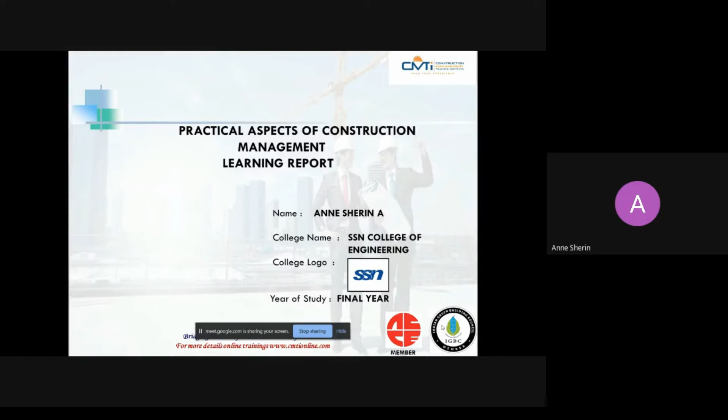I'm going to share the knowledge I acquired during this one month internship on practical aspects of construction management. I'm Anne Sherin, studying final year civil engineering at SSN College of Engineering. I'll cover topics such as construction site safety, reading of drawings, construction methodology, quality assurance and control, and finishes.

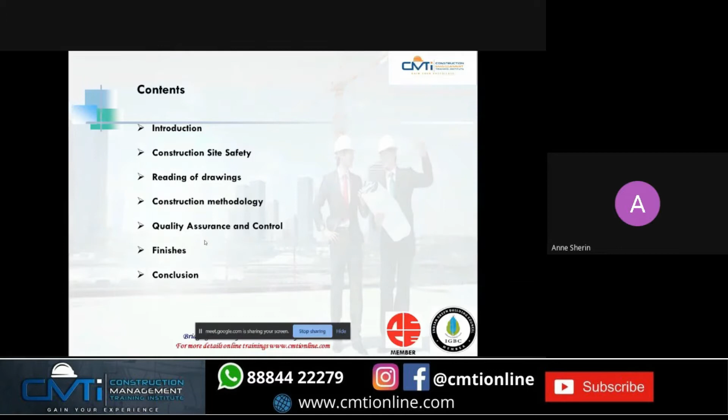Construction site safety is one of the most important topics for all site engineers and civil engineers to know, because our health and our life are more important when it comes to work.

As per the survey, 56% of accidents occur due to height factors, such as working at height or falling from higher regions. 21% occur due to being trapped by something collapsing or overturning materials or machinery. 10% is due to being struck by a moving vehicle, 5% by electricity or electrical discharge, 4% by being struck by a flying or falling object, 3% by contact with moving machinery, and 1% by exposure to hot and harmful substances, like heating materials.

The first and foremost thing to see is safe access on site. Everybody should have safe access to come to the site. The edges where people could fall must be provided with double guard rails or suitable edge protection so people won't fall off.

That's why most construction sites have barricading, because normal people can't enter the project site—if anything goes wrong, the project will come under problem, and it's not good practice. Any construction site you visit will be closed off with GA sheets or similar, and only security will permit entry. Even engineers going to the project site are given orientation at the entry point itself.

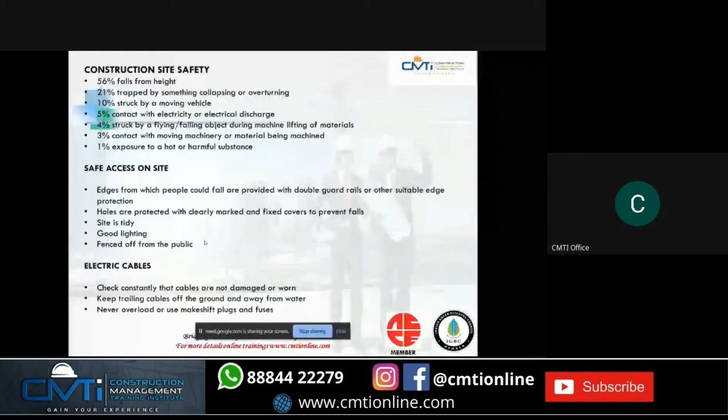That's why every project has a safety park or safety orientation room at the entrance where they give orientation. After that, with their people, you can go inside the project.

Another thing is holes—holes must be protected and clearly marked. As mentioned, they should be fenced off from the public for safety reasons.

Another thing is electric cables. Especially during rainy seasons, they should be properly maintained and carefully insulated, and we have to note any damaged or worn out cables, because contact with water can seriously affect anyone who accesses it. Inside, we also have to use plugs and fuses. Many new technologies are available in the market—for example, if there's a short circuit in any electric branch, the entire line will be cut off so we can stay safe. We have to make use of these technologies for electric cables.

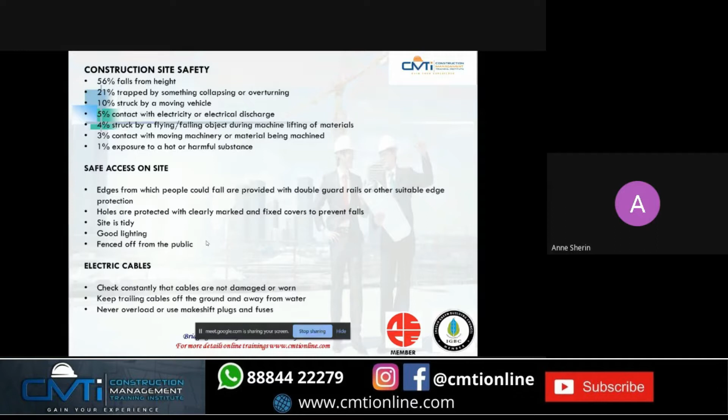Working at heights is another very important factor to consider—proper nets and other features should be used. While using ladders or scaffolding, proper fixing and base support should be provided so they stand sturdy. We should not use incomplete or damaged scaffolding; it should be safe, and handrails and toe boards must be provided at all edges.

And coming to the ladder, we should not allow more than one person on the ladder.

Do not lean out from the ladder in any direction. It should be positioned near the object while we are working. We should not allow others to work under a ladder in use, because something may fall, or the ladder may slip onto the person working under it. So we should not work under the ladder.

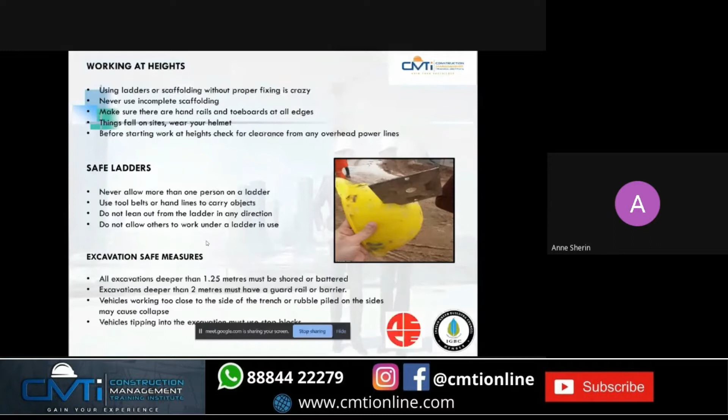For excavation safety measures, when the excavation is more than 1.25 meters, we have to provide shorings and battering supports, because we do not know much about the soil type, so it may slide off. We should provide protective shorings, and if it is more than 2 meters, we have to provide guardrails or barriers.

Also, vehicles like cranes and JCBs coming near a trench or excavation should move very cautiously, because they may slip into the excavation. So we should use stop blocks for vehicles to prevent them from coming near the excavations.

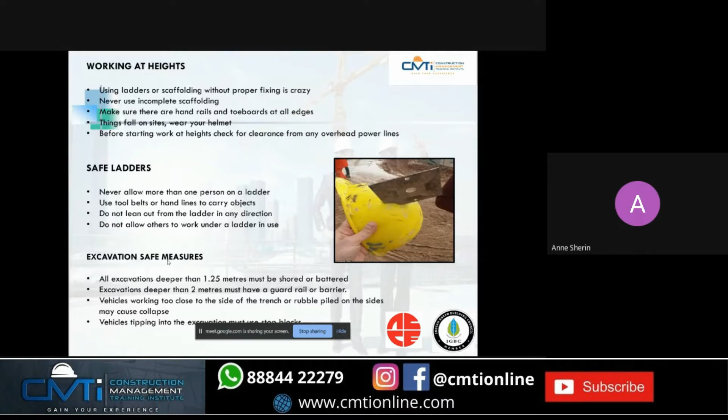Another thing is crane safety. The weight of the load must be carefully estimated, because if we overload the crane, it may overturn or slip. We have to perfectly calculate the weight of the load before loading the crane. The load must also be properly fixed, with no eccentricity, because it may tend to slip as the load acts on one side of the crane only. The bankman must also be trained to give clear signals.

Also, there should be a suitable base closure to prevent people from entering, surrounded by nets or grills so it is safe for people around it. The landing gates should be kept shut except when the platform is at the landing operation, or whenever it is in operation.

So these are some points to be noted while considering construction site safety, because safety is everyone's responsibility. We have to take care of our own safety and also the safety of the people around us.

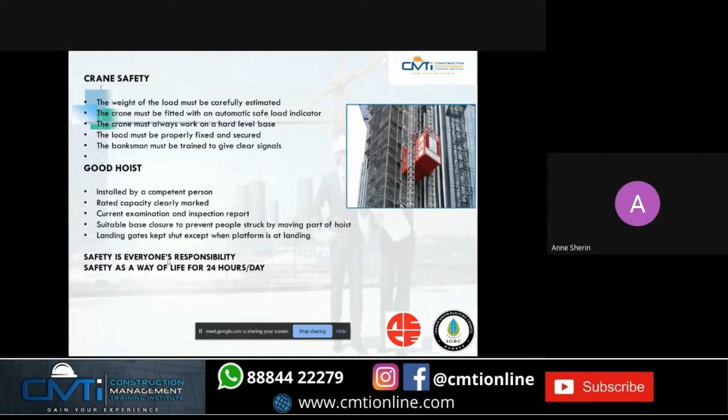And next we are coming to reading of drawings. One drawing... In a way of safety, I would like to add - go to the earlier slide. Okay sir.

Most of the people working in construction sites are from an agriculture background, they don't know about construction works. If they are new to the project site, they tend to get into an accident. Statistics say this happens because they are not trained on construction safety. Big companies train on safety and give induction training before sending workers to the site. But small companies directly send workers to the site, and accidents happen, hurting workers, causing a lot of injury, all due to ignorance of construction safety.

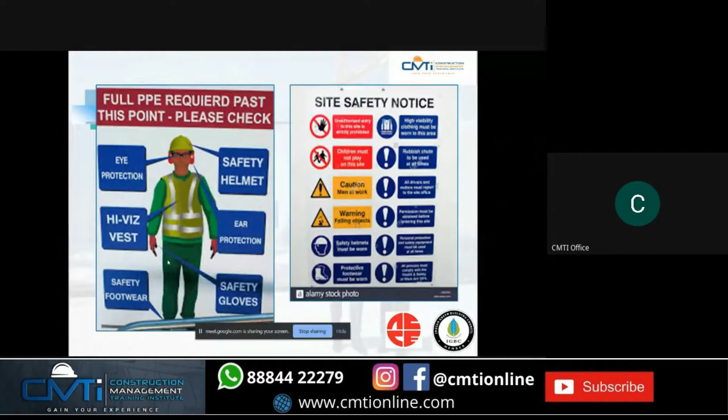Drawings are a way of communication between civil engineers. It's very important for all civil engineers to know this, because design engineers communicate via drawings to people on site. So it forms a communication channel between design engineers and the people working on site. A drawing sheet consists of plans, sections, elevations, schedules, and details.

Now we are going to see each of the components present in the drawing sheet.

The title block is generally present at the bottom of the drawing sheet, and its size and shape vary from project to project. This is a very important section because it gives information about the project, company, copyright information, plan number, drawing sheet number, revision date, scale of the drawing, sheet number, etc. So it gives a lot of information about the project and the drawings.

Each one should read the title block before starting to read the other drawings.

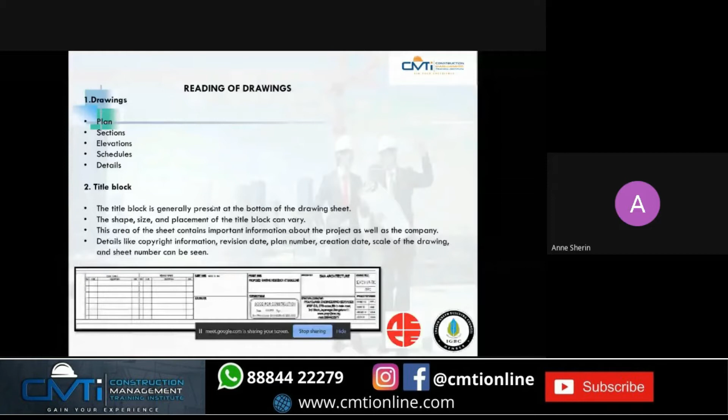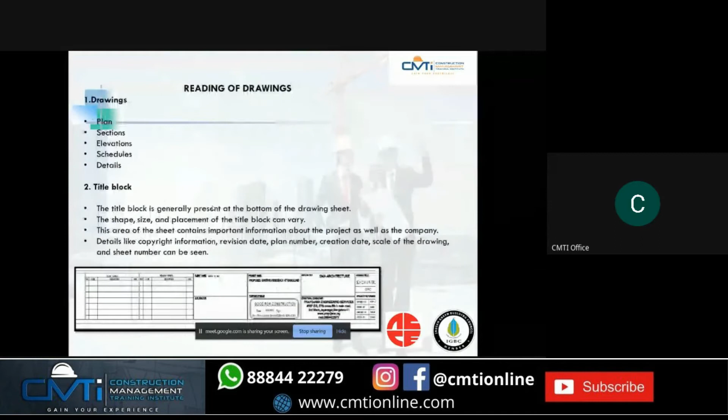Another important label is 'good for construction'. This seal is important for the title block approval. There will be a drawing number and reference given, and a title, and the stakeholders available. That information tells you whether you are referring to the correct project and using the correct drawing. You should verify.

After that, you have to read the drawings, because many times the drawing looks similar but may be used for another project.

Nowadays, the technology is advanced. They are having a barcode system, similar to how you use barcodes in Paytm or Google Pay. Similarly, in a drawing sheet, they mention barcodes because drawings go through revisions, as changes keep happening. So the engineer at the project site has to use the latest drawing. The technology is advancing, and a lot of large companies have an app on their mobile itself.

So that you can refer to only the latest drawing available in the app. Apart from this, they are using this barcode system also, because thousands of drawings are coming in - how will they be maintained? So they are using barcodes also. That is the latest advancement in drawings.

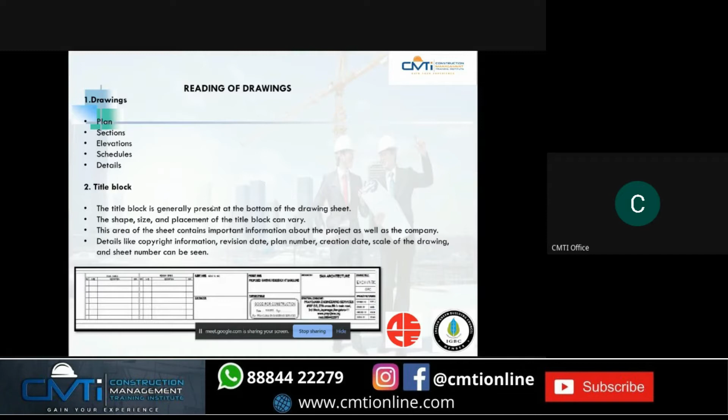The next thing is 'good for construction'. It's a very important label present in the title block. It is very important for the approval or initiation of a construction project. So we have to look for this, and it also includes the name of the client, architect, and the project engineer or the in-charge for the project.

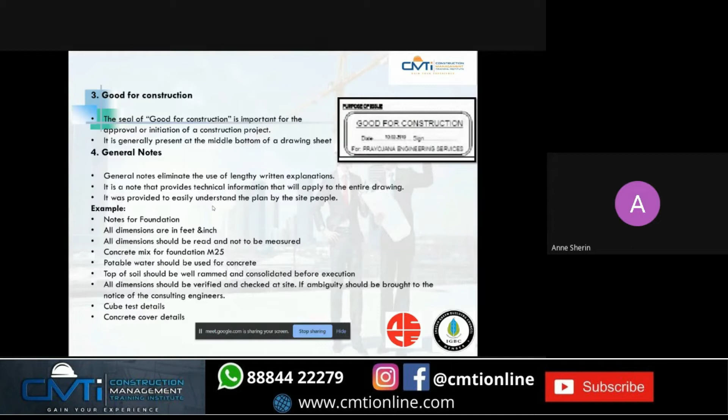The next thing is general notes. It eliminates the use of lengthy written explanations. The general notes give all the technical information required for people working on site. It should be provided so the site people can easily understand the plan. It includes general notes such as concrete cover details and dimensions, whether in feet, inches, or meters, concrete mix ratios for foundations and other structural components such as beams or columns, what kind of water should be used, and cube test details will also be included in the general notes. So it consists of all the details.

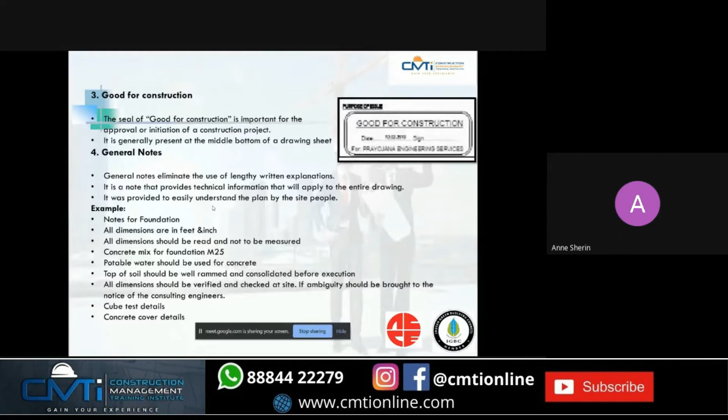Another thing is abbreviations. Abbreviations are common in structural drawings. We have to understand some common abbreviations such as DP for depth and DIA for diameter, and there are a lot more abbreviations. These abbreviations will also be given in the general notes.

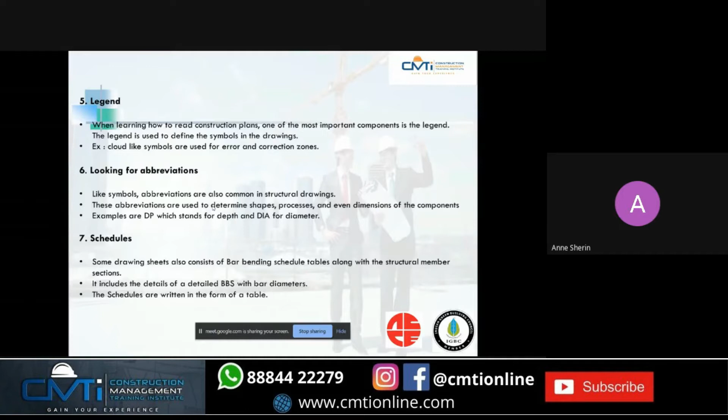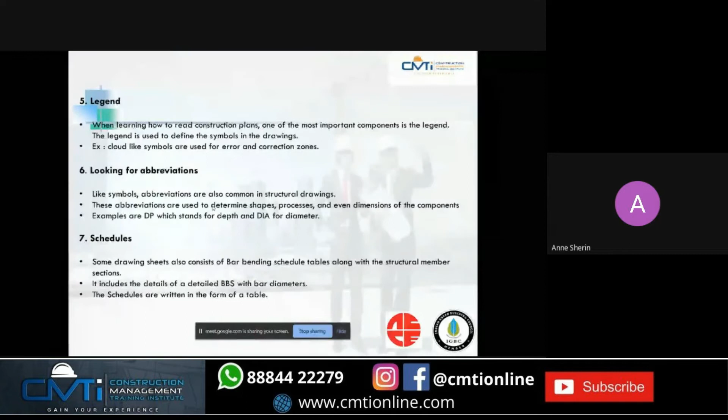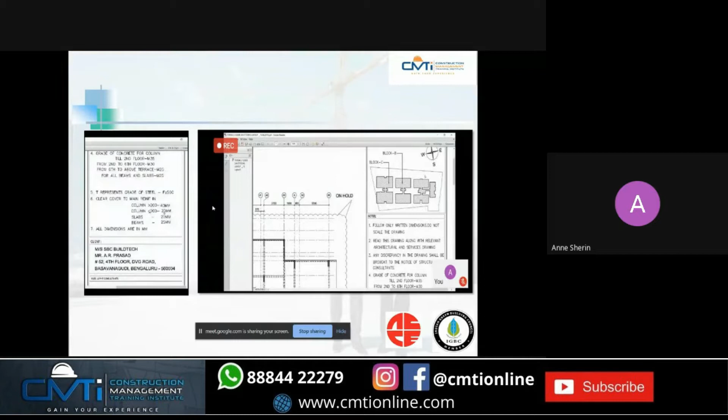Okay, our next topic is construction methodology - the sequences which are taking place in the construction work.

The first thing is preparation before excavation. This is a very important step because we have to check for any structures underground or above ground inside the boundary, and any presence of water table so that we can arrange for the dewatering works. We should analyze the surroundings and prepare before the excavation process starts, marking the layout and center line by manual methods or by theodolite or a total station.

The next step is excavation and foundation. While excavating, if the foundation size is 2 meters into 2 meters, we should not excavate the exact size. We have to leave 300 extra on all the sides for the working spaces, for tying the reinforcement, and for all the works.

If the depth of excavation is more than 1.5 meters, we have to arrange for soil strengthening, such as battered supports, so that it won't slip or close the excavation. Also we have to arrange space to stack the excavated earth, which can be used for backfilling after we construct the plinth wall.

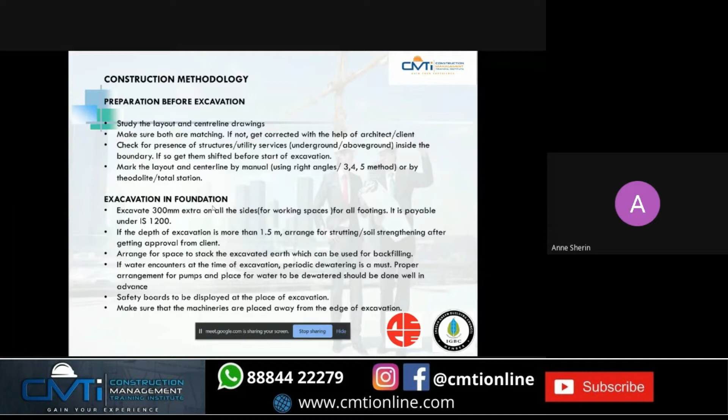Dewatering arrangements for pumps and a place for water to be dewatered should be done well in advance. Safety boards and signages should be displayed at the place of excavation for the safety of site workers and all other people. Machineries should be placed away from the excavation so that they won't fall into it.

The next thing is marking of foundation. In the picture we can clearly see the plan exactly drawn in the field, and the places to be excavated. These marks are made by taking reference from permanent structures, adjacent buildings, roads, or anything. The lines are marked using tape, right angles, marking blocks, marking threads, and marking powder or line powder. If the footings are marked using grid lines, it will be easy.

The next thing is shuttering for footings. Shutterings are either done using MS sheet or plywood and runners as per the client requirement. We have to apply shuttering oil or grease over the shuttering material before placing it, because it won't extract water from the concrete. The shuttering should also be properly supported by wooden supports or MS props.

One correction - waste oil should not be used. Nowadays form release oils are available, and we should use those instead. We should use oil, grease, diesel - actually no, we should not use waste oil. Nowadays form release agents are available, and that is a good practice. You can correct yourself there and proceed.

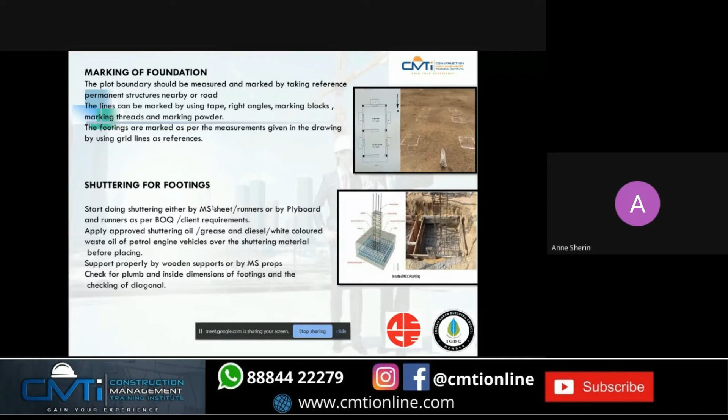Then there's RCC in footing. Before doing the RCC works, we have to test the concrete strength with a slump cone test for ensuring the quality of the concrete, and if the slump is more we have to reject it. During concreting, pour the concrete in layers and vibrate it properly using vibrators available in the market, such as needle vibrators. We have to cure it for at least 7 days, and de-shuttering should be done only after 24 hours, after inspecting whether the concrete has set.

After finishing the footing works, we come to the column works. First we cast a small piece of column before the main column is cast, known as the starter. We cast the starter because it is easier to establish and verify the center line, so that any error in the center line can be predicted if we start with the starter.

Also, the grade of concrete used for concreting the starter should be the same as that used for the column. It should also be cured for at least 7 days.

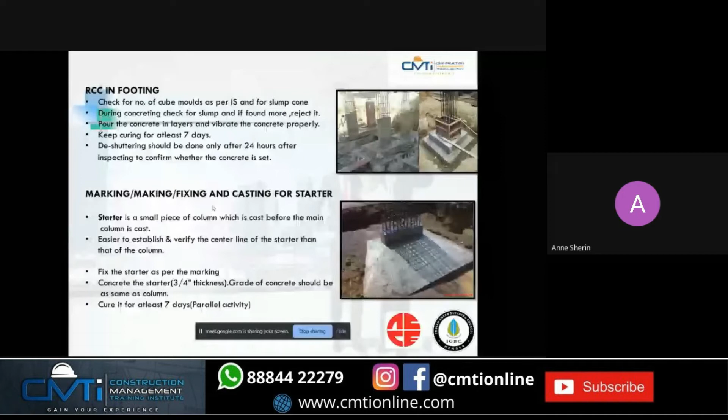The next is column reinforcement above footing. The lapping of column should be done, and care should be taken to have staggered lapping. According to IS code 456, lapping should not be done at points where 50% of total number of rods in a column overlap. Lapping should be done at the middle of the column when going to the upper floors, and they tie the stirrups as per spacing shown in the diagram.

Also take care that the column reinforcement should be protruded at least one lap length above the level of concrete. So the shuttering in columns is done using silver wood plyboards, or now many kinds of shuttering work are available, like MS sheets with MS props or anything. Also slab and beam shuttering can be done with the same MS props and silver wood with plyboards.

Also the shuttering time is very important. For beams spanning less than 4.5 meters, it should be 7 days. And for beams spanning greater than 4.5 meters, it should be 14 days.

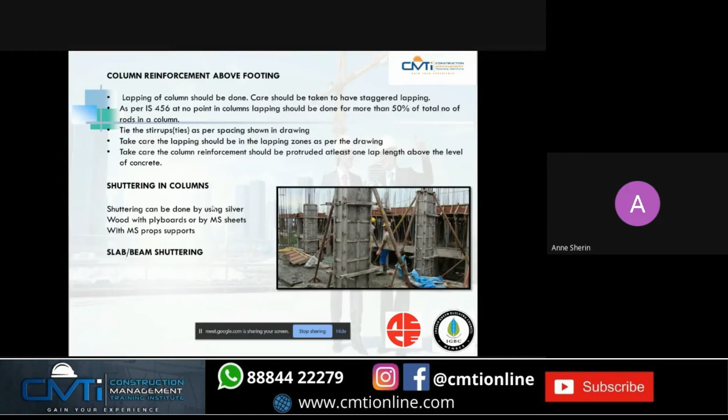The reinforcement for slabs and beams should be placed carefully as per the drawing and design details. Chairs and spacer bars are provided in reinforcement because chairs are provided to separate layers of reinforcement, so that the top reinforcement is not subject to any creep, and so that the concrete will be filled between the top and bottom. The diameter of the chair should not be less than 16 mm, and the spacing should be 1 meter center to center.

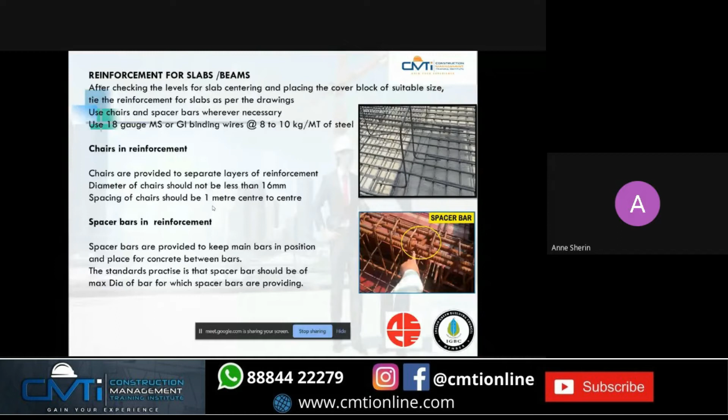The spacer bars, we use between the rebars in the bottom or top reinforcement. It provides some distance to accommodate the concrete between those two rebars. The standard practice is that the spacer bar should be of the maximum diameter of the bar for which it is providing spacing. If you are using two bars, one 10 mm and another 16 mm, we should take the 16 mm as the diameter of the spacer bar.

Then comes the block work. Using masonry drawings, the mason will start a starter course. This starter course helps us produce the first layer in a correct order, so that we can follow the same course for the upcoming courses. This process is continued to place succeeding courses. For every course, the plumb is checked for the verticality of the walls, and a float bar is also used to check the alignment. Then comes the plastering.

The plastering is started after the completion of the block work, and bull marks are also marked on walls for equal level of plastering on the walls or beam levels. The wall is sprayed with water before the plastering works, so that the blocks won't absorb the water from the plastering cement.

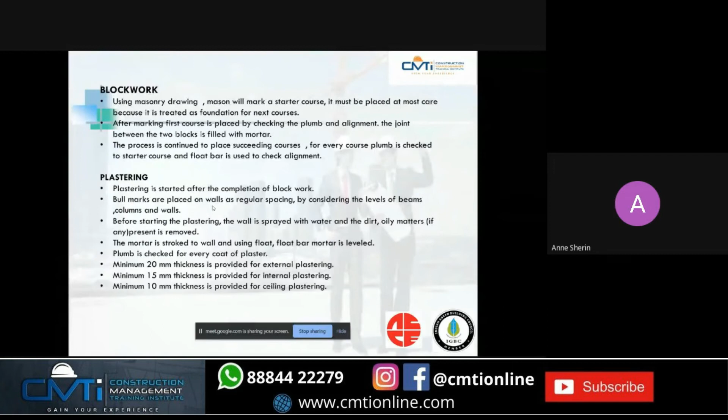Then the plumb is checked for every coat of plaster. For external plastering, a minimum of 20 mm thickness is provided. For internal plastering, 15 mm is provided. And for ceiling plastering, 10 mm thickness is provided.

So then the next topic is quality assurance and quality control. What do you mean by quality control? It means producing a product that meets customer satisfaction and is fit for use as per standards, which is known as the quality of the product. It should meet the customer satisfaction and be of required quality. For example, the aggregate should meet the quality as described in IS 383.

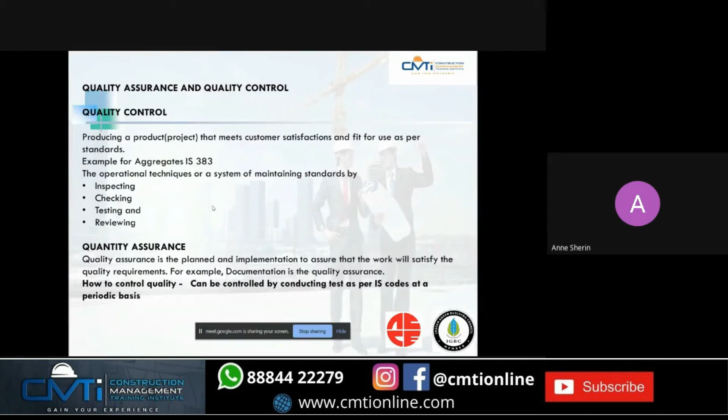So the operational techniques or system of maintaining standards by quality assurance and control should follow these steps: first inspect, then check, then testing, and then comes reviewing of the results. Quality assurance means it's a plan or implementation to assure that the work will satisfy the quality requirements, for example by conducting tests as per IS codes for the materials in the task, or documentation is also some kind of quality assurance.

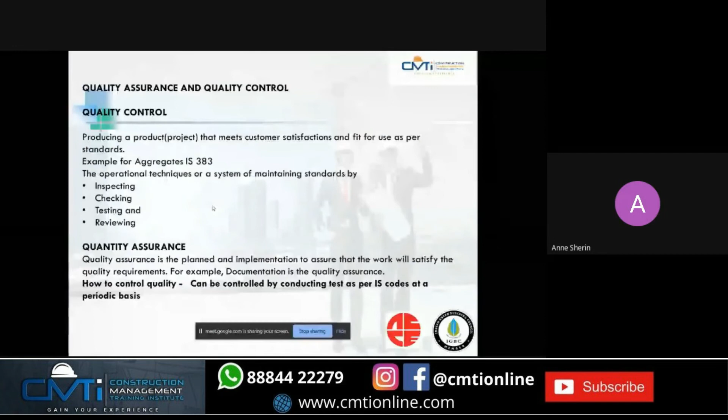Let's see some of the field tests for cement, aggregates, sand, and blocks. First is cement. The date of packing, the date of manufacture should be seen on the bag. It's very important to note the date of manufacture, because...

After the opening of the bag, the cement will be good for only 3 months. We also know that the strength of cement reduces with age. So it's very important to note the date of packing and the color. The cement should be uniform in color, with a color of gray with a light greenish shade. The color of cement also gives us an indication of excess lime or clay or the degree of burning.

So it's important to check the color and do the rubbing test. We should take a pinch of cement between the fingers and rub it. We should feel smooth; if we feel rough, it shows some adulteration with sand or indicates the presence of dirt materials.

The next thing is physical feel. We have to insert our hand into the cement bag and feel a cool feeling, because the cool feeling indicates that no hydration reaction is taking place in the bag. We know that when cement reacts with water, it undergoes the hydration reaction, and heat is emitted from the cement. So we have to make sure no hydration reaction takes place in the bag.

The next is the float test. The cement should float for some time before sinking into the water. We have to test for that.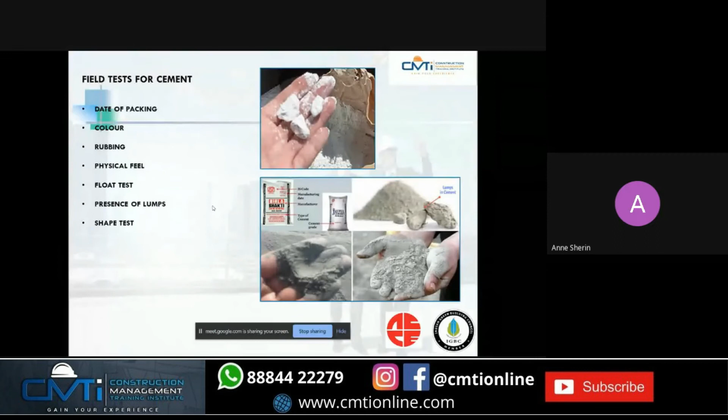And next comes bricks and aggregates. The first thing is water absorption. We have to take around 5 bricks and immerse them in water for 24 hours. We have to take the brick weight before immersion and after immersion. The difference in weight should not exceed 20% of the average weight of dry bricks. This indicates good quality of bricks.

By visual inspection, the shape and the quality - color, rectangular shape with sharp edges - indicates good quality of the bricks. And efflorescence: efflorescence is nothing but the presence of salt deposit.

We have to take a brick and immerse it in distilled water. The whole water is allowed to be absorbed by the brick and evaporated through it. After the brick appears dry, a similar quantity of water is placed in the dish and allowed to evaporate as before. When we take the brick from the water, if we see no deposit of white color, that is salt - no deposit of salt means it has no efflorescence.

If 10% of the area of the brick is covered with salt, it is slight efflorescence. If it's around 50%, it is moderate efflorescence. If it is more than 50%, it is heavy efflorescence. If the salt deposit occupies the entire portion of the brick, it is very heavy, highly efflorescent. Bricks for general construction should not have more than slight to moderate efflorescence, so it can have 10% up to 50%.

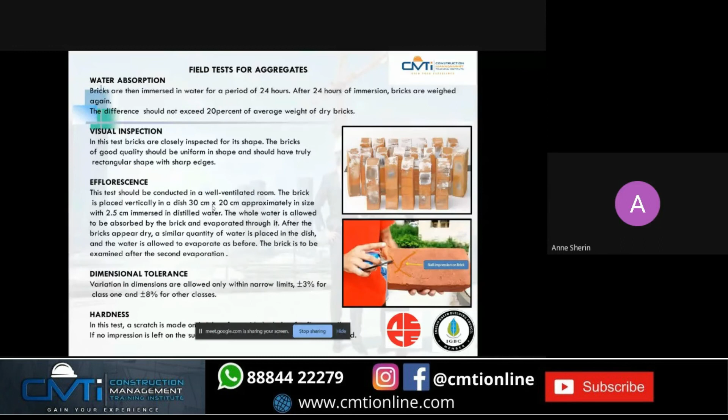Next is soundness. We have to take 2 bricks in our hand and struck them with each other. A good brick of good quality should not break, and a clear ringing sound will be produced.

And the structure: it should be homogeneous, compact, and free from defects such as holes and lumps. We can easily see this with our naked eye.

Next comes the field test for aggregate. There are a lot of tests for aggregates, in lab as well as field tests. Some of the important tests are sieve analysis - we have to sieve the fine aggregate as well as the coarse aggregates before starting the project - and elongation and flakiness test. In the picture, the elongated particles are on the right side and flat particles on the left side. We should have moderate aggregate; it should not be more flat or more elongated.

The color, shape, and water absorption test is also done for the aggregates; it should not be more than 20%. For fine aggregates, the tests are sieve analysis, silt content, and bulking of sand is also important.

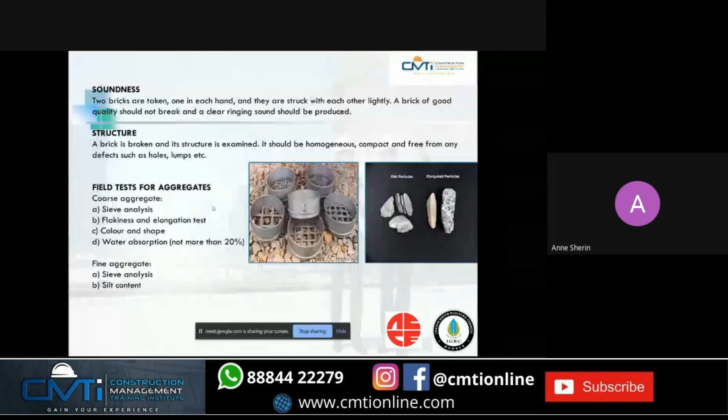Next comes the important part: quality test on steel. The easiest thing to identify is the length of the bar, which should be between 11 to 12 meters, because 12 meters is the standard length of a steel bar. The steel should not be corroded, and it should appear gray in color. In lab there are a lot of tests for steel - tensile strength tests, chemical tests, elongation tests. On site, the most commonly done is bend and rebend test.

The specimen should be bent at an included angle of 135 degrees. Then it should be aged in boiling water for 30 minutes, and we have to let it cool.

Then rebend to an included angle of 157 degrees. If we do not see any crack or rupture, then the steel is of good quality.

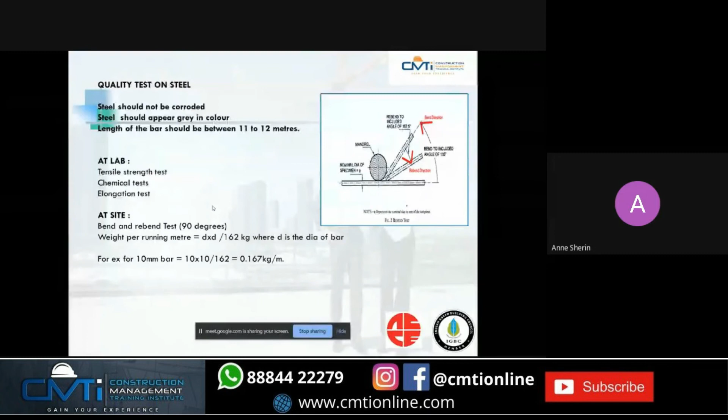Also, the weight per running meter is calculated by D square divided by 162 kg, where D is the diameter of the bar. For example, a 10mm bar should have a weight of 0.167 kg per meter run. So we can test these things and ensure the quality of materials on site.

Then comes the last part, the building finishes. I'm now going to share my knowledge on painting. There are different types of painting like oil-bound distemper, plastic emulsion, royal silk painting, oil emulsion painting, wallpapers, and texture painting. Different paints are used for different needs and functions.

So the basic steps involved in painting: first we have to check the type of paint approved for the project. For example, for steel we will go for some kind of paint, and for normal residential buildings we will go for another kind of paint. So we have to check the type of paint.

Next, we have to prepare the surface for painting by clearing any holes or defects. Then we apply an oil-based primer coat as the first coat over the plastered surface. Then we apply one coat of Birla putty to ensure a smooth surface, followed by sandpaper application to remove undulations, using 80 to 100 grade sandpaper.

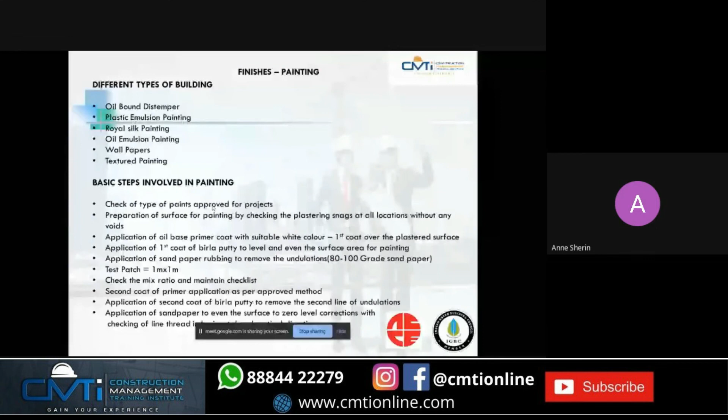Then we test a small region, a test patch of 1 meter by 1 meter. If the color and everything is okay, we proceed with the work. We maintain a checklist for each activity. After the first coat, we apply a second coat of primer, followed by Birla putty and sandpaper, and finally we paint the wall.

Some components involved in painting: first is Birla white putty application. Generally 2 coats of putty are preferred, with coverage of about 25 square feet per kg for the first coat and 12 square feet per kg for the second coat. The cost of Birla putty is, for a 30 kg bag, rupees 600.

Next is sandpaper. The surface is rough because it is made up of abrasive minerals like aluminum oxide, glued onto the paper surface. These minerals have sharp points or edges which help remove defects or undulations in the wall. Generally for the first coat we use 80 to 100 grit paper, and for the second coat 120 grit paper.

Next is the moisture meter. These instruments help detect the level of moisture in different materials, and it is used to check the moisture level in walls. The acceptable moisture level in general walls is less than 5%.

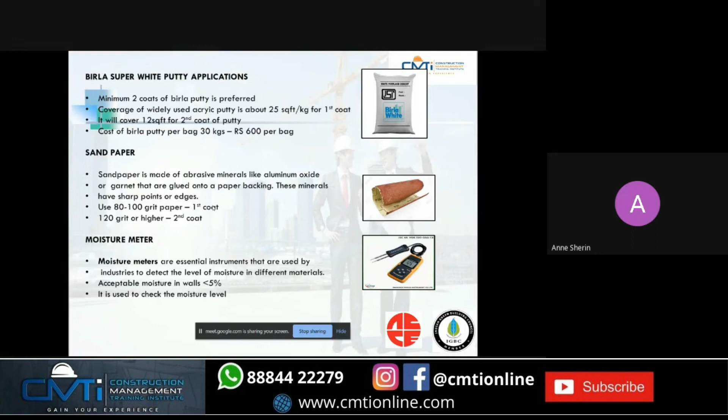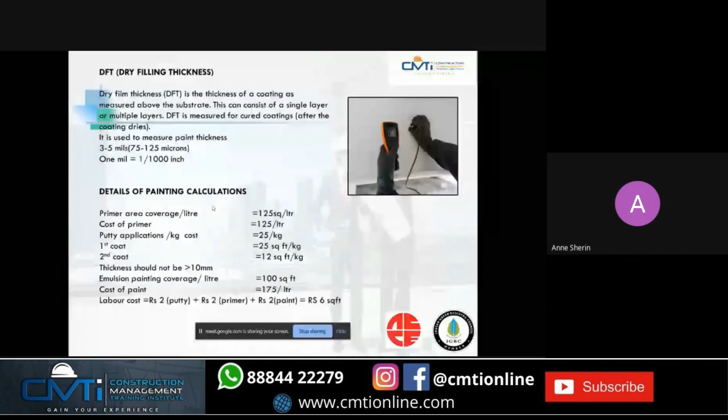Next is DFT, dry film thickness, used to measure the thickness of the coating. The machine consists of a sensor which is placed on the wall and indicates the thickness on the device. It is used to measure paint thickness, measured in mils. 1 mil is equal to 1/1000 inch.

The details for painting and cost are given below. For primer, the area covered is 125 square feet per liter, and the cost of primer is 125 rupees per liter. For putty, first coat covers 25 square feet per kg, and second coat 12 square feet per kg. Labor cost is also included at rupees 2 for these applications. These are the details of painting.

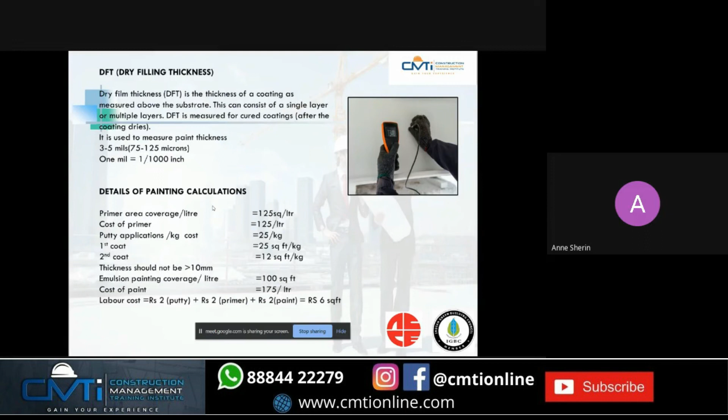Good report, Annie. All the best for your future also. Sir Natarajan sir, your comments, any comments for her? Yeah. Yeah, I have seen that report from Annie. I have given some this one what you call the comments. So based on that, she has rectified that. Some photographs for quality control and safety. I have Okay. asked them to ask her to add it. She has done it. No problem. Good. Okay, sir. Okay, sir. Thank you. And you can start your presentation for the students. Right. Annie, Right. you can stay on and you can attend the classes also. Okay. Okay, sir. Thank you, sir. Okay. Okay.